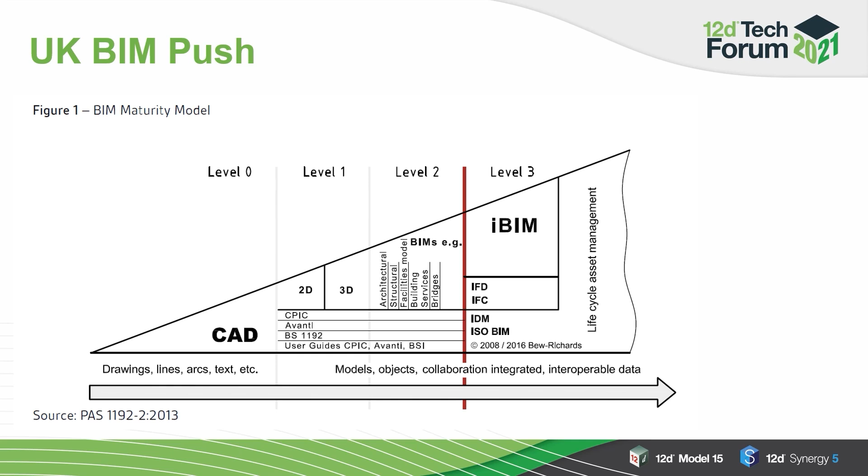What this set up, and this was their outline, is you had down at level 0 just drawings, CAD. Then you had some 2D and level 1, which had some 3D data. And further on down the track, they started to do more total models. But in that, there was no roads, rail, tunnels at all.

Now, I'm going to talk about two types of BIM, vertical and horizontal. But they're both civil projects. So why on earth didn't the IFCs to date in 2x3 cover both of them? I'm going to look at the differences that caused all the concerns. With a vertical project, it's confined to a small area, usually a building site, and then you go on up. You use a local origin, say 0, 0, and you measure distances from it. So you have small coordinates. And the distances are ground distances, the distance you get when you use a tape measure. A rectangular grid is normally used for setting out things, and the objects are 3D with a volume.

For a horizontal project, it goes over kilometres, even hundreds of kilometres. We have to use, therefore, world coordinates, which are mapping coordinates, and they're in the millions. We need that because you need to be able to place anything anywhere in the world for roads and things. You can't just take over the whole site that you're going to work on forever. The distances are what we call grid distances or map distances, and they're not ground units. That's important. It's not the same as you get with a tape measure. We have to use linear referencing, where you use alignment and offset. Think chainage and offset, station and offset. And the objects are points, strings, tins, and 3D objects which have a volume.

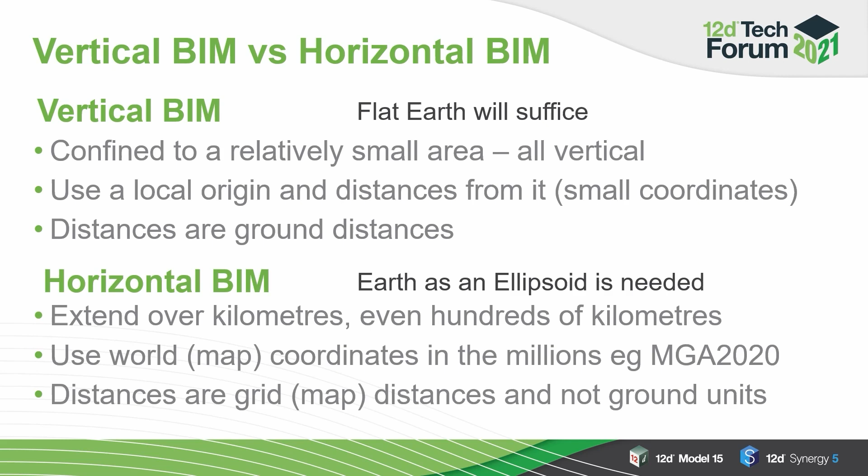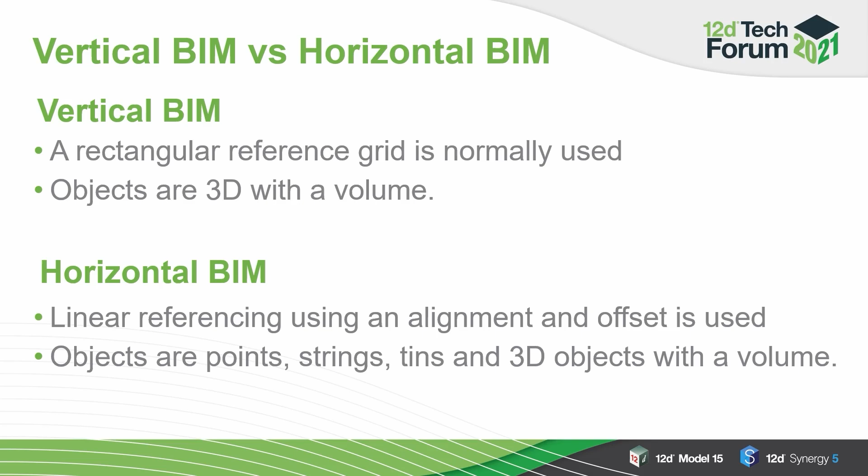Also, for vertical BIM, you have a rectangular reference grid, and your objects have 3D with volume. Whereas in civil BIM, your reference is usually used with an alignment and an offset being used. As I say, there are all sorts of different types of objects - points, strings, tins, alignments - which were not in IFC 2x3.

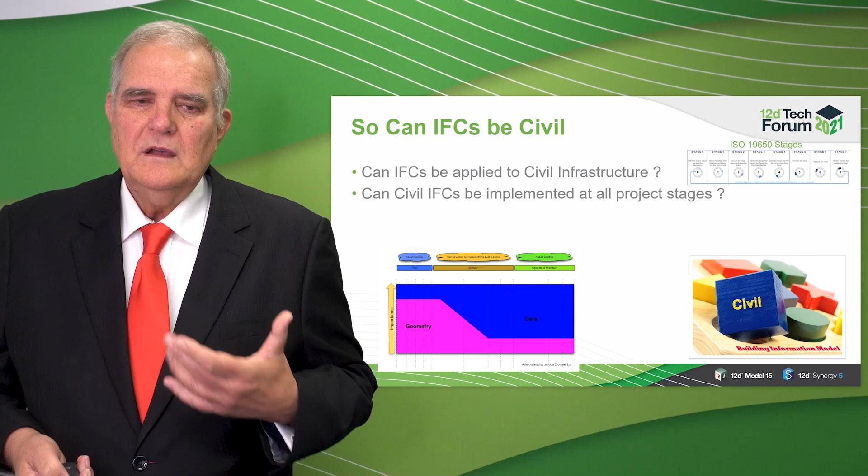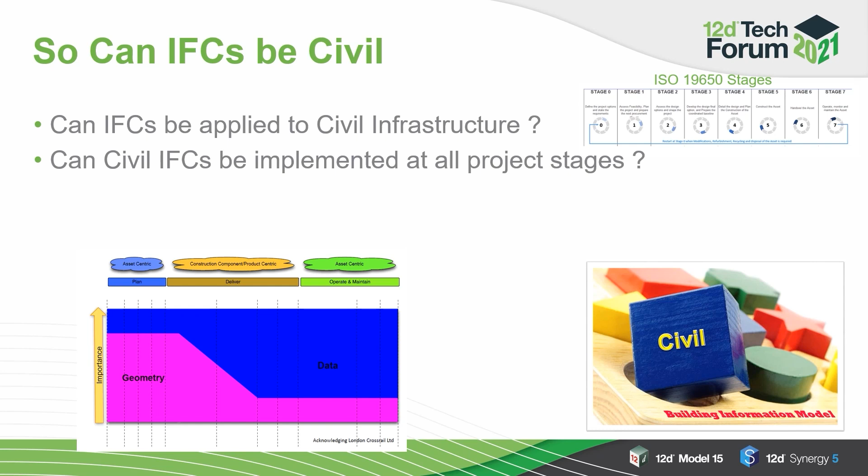Now, can IFCs be civil? Can IFCs be applied to civil infrastructure? Can they be implemented for all stages of projects? Because if you go to the Building Smart International talks, they talk about IFCs being used throughout the whole project. So if you look at your 19650s, it's got all these different stages mentioned, and what's needed over a life cycle of a project changes.

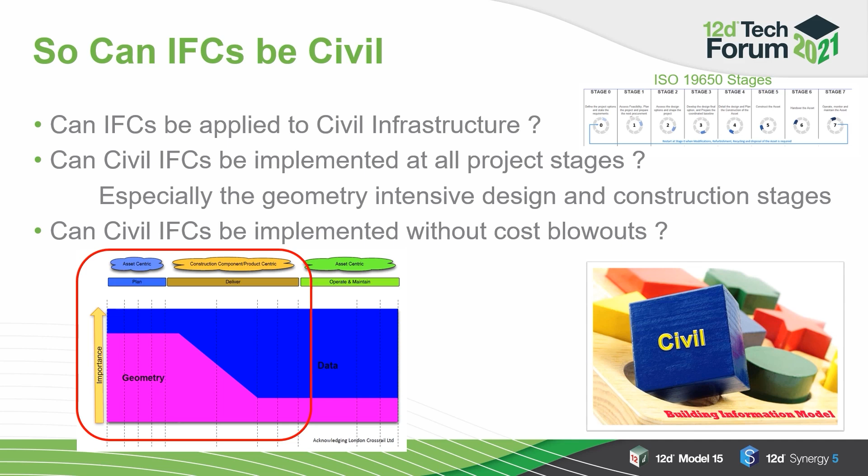Right at the beginning, up until it's actually constructed, you have a lot of geometry. Often after that, you only have lots of attributes. In fact, when you're going to asset management systems, sometimes they don't even take your geometry - all they want is a whole lot of attributes. So we're really worried about that early stage where it's thick on geometry. So can you also implement IFCs without cost blowouts? Because you really are trying to beat that project clock.

To be a civil BIM system, you need to support large coordinates. You need to handle long and large horizontal projects using map coordinates, not local coordinates. You need alignments with transitions and things. You need linear referencing. You need helixes for arcs.

Now, why on earth do you need that? Why don't you just need an arc in 3D? Well, that's not what we use in civil. A pipe is usually an arc when projected down onto the plan. Then your Z value runs up the side of that, so it's actually a helix. Not many people realise that.

You need strings with diameters and without diameters. You have survey points, break lines, edge of roads and so on, drainage pits and pipes, null Z values. Now people say, why wouldn't you want a Z value? Well, if you're a surveyor or someone else, you don't want to give it a Z value if you don't know one - someone might believe you. Cadastral information usually doesn't come with Z values, so you don't want to give one. A name and coding system.

Actually, in Australia, we've used that from at least 1980 - codes for all the strings and objects. You want tins for surfaces, like your ground surface. You need point clouds, since that's the way a lot of this data is now being picked up. You need polymeshes or trimeshes for 3D objects, and you want hierarchical attributes for your strings, vertices, segments, tins, polymeshes, and so on.

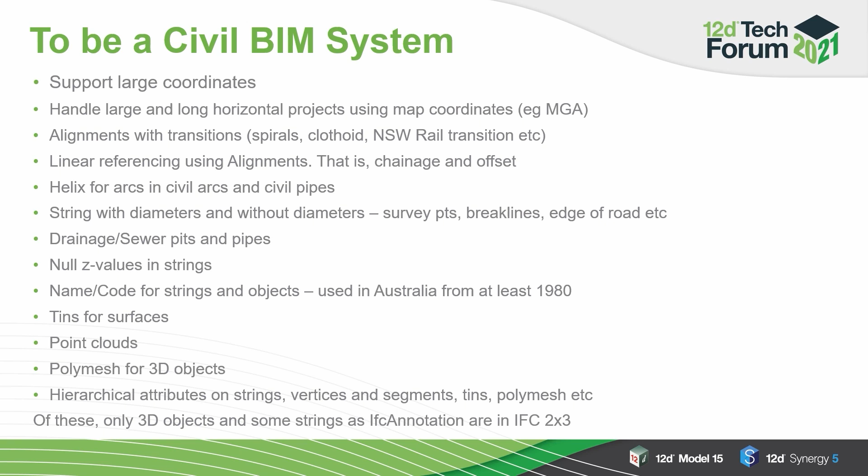Of these, only 3D objects and some strings were actually in IFC 2x3, and that's what's been around for the last 15 years. So Building Smart International were aware of this, and so they had a number of working groups looking at extending IFCs to civil - they were working on roads, rail, bridges and tunnels.

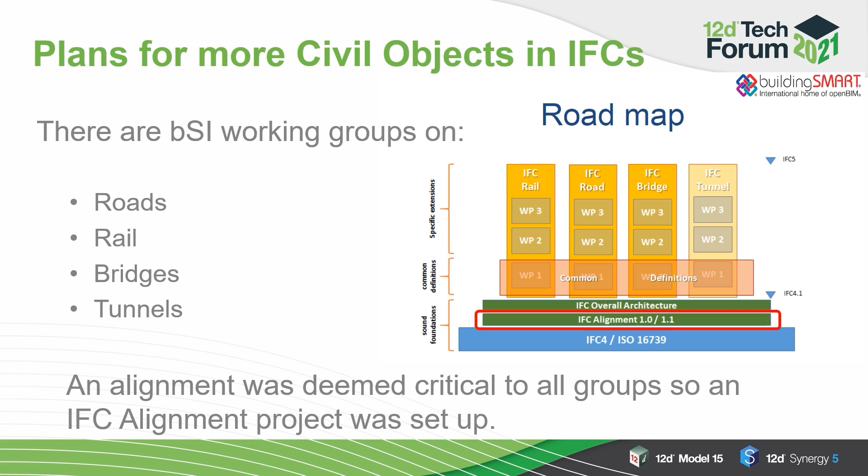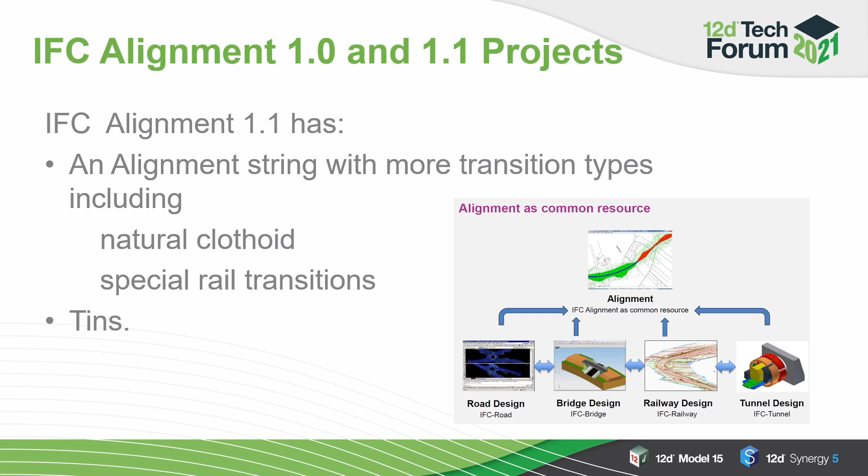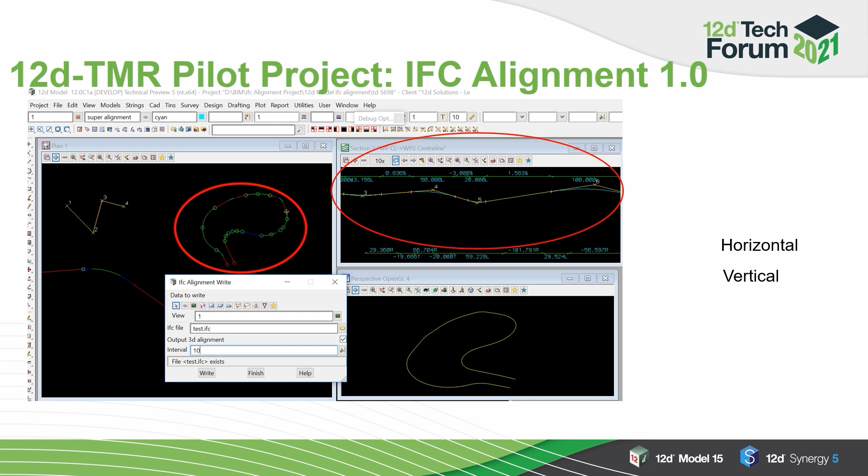And what they realised, an alignment was deemed critical to all the groups. So an IFC alignment project was set up. Alignment 1.1 was the final one, and it had strings with more transition types including the natural clothoid and special rail transitions. It also had tins. We were involved in that project with the main roads, and basically we actually read in an IFC alignment string with a horizontal and vertical - remember, you can have horizontal without vertical, and also the 3D alignment. And we presented that in 2016.

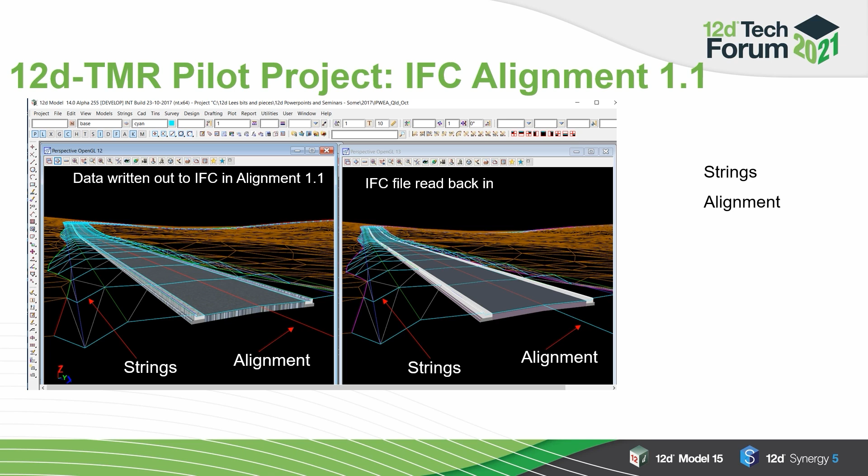Then we continued on with this work, and you could again have strings and tins and alignments and the 3D objects that go with them, such as the road pavements. And basically that was in 2017, so that was alignment 1.1. And that's the whole thing written out again, read back in to show, yes, it's all there properly.

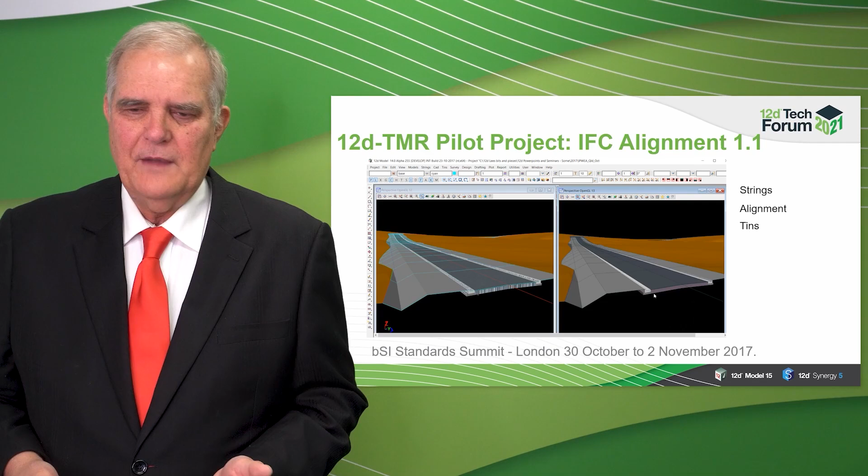Now, what was the outcome of that IFC 4x1 project? Zilch. Although 12D Model and a number of software groups participated and successfully passed around alignments and tins, when IFC 4x1 was actually released, the traditional architectural BIM software vendors never implemented it, and the industry was left stuck with a 15-year-old IFC 2x3.

What do you do in such a situation? Well, a lot of people then start talking about digital engineering and wait for IFCs to mature. So what is digital engineering? Deja vu - again, most people have no idea what it is.

Luckily, Transport for New South Wales came to the rescue here and gave a bit of an idea of what it was. It says a collaborative way of working using digital processes to enable more productive methods of planning, design, and so on. And this is achieved by creating a common data environment, whatever that is, that aligns digital information including CAD, GIS, 3D BIM, and so on. So we did at least have something about digital engineering.

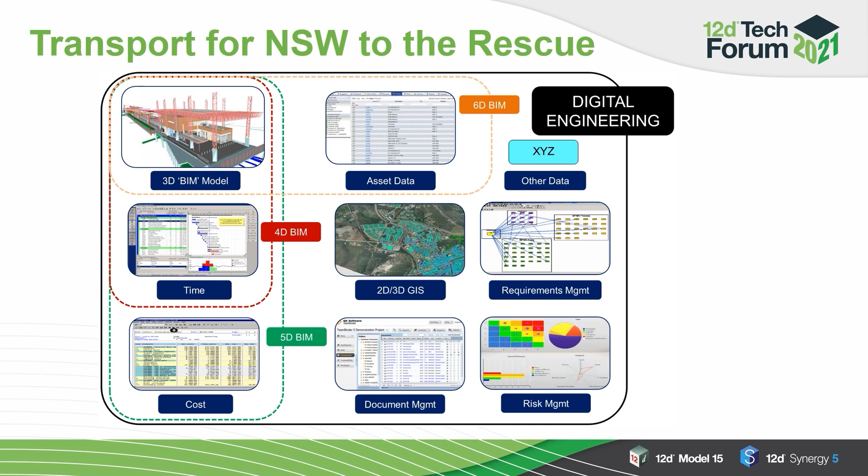Now, do not despair though. Building Smart International has continued to work on the problem, and they came up with two things: the model setup IDM and also IFC 4x3. The Building Smart model setup Information Delivery Manual - what a mouthful - was then restarted, and the project was started off again in 2016.

John Mitchell from Australia was the lead. Then 12 nations were involved, including Australia, and I was part of that and produced a lot of the information for it. It spelled out what ellipsoids, projections, and map coordinates are, also emphasised that civil projects must be in map coordinates, and said the vertical and horizontal datums and the map projections are stored in the IFC Projected CRS entity - so it's right there for it. And IFC 4x3 extended this to any CRS and map projection, whereas the early ones didn't allow all the ones.

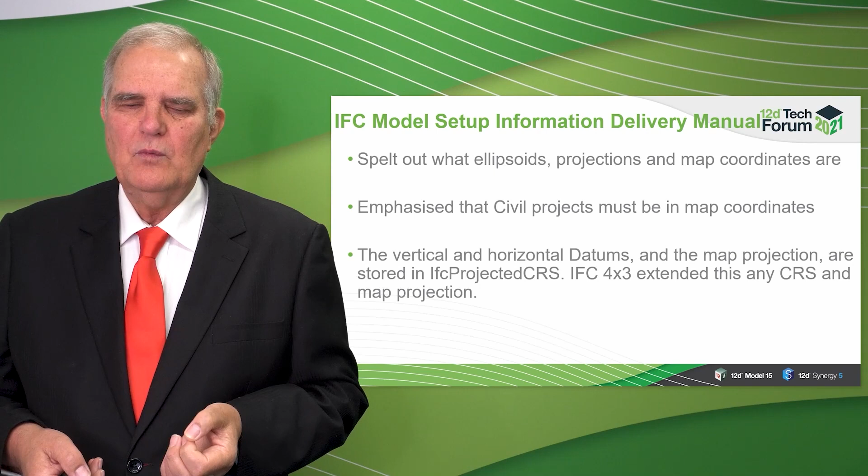Similarly, it also said how a 2D Helmert transformation could be used to bring small little area sub-projects, which are in flat Earth local engineering coordinates, into your overall map coordinate project. So you've got a small little one, and how does it fit with a big one? This is the big quandary, the big problem. And the required 2D parameters are stored in what's called the IFC map conversion. So all that information could be passed over if you brought in such data.

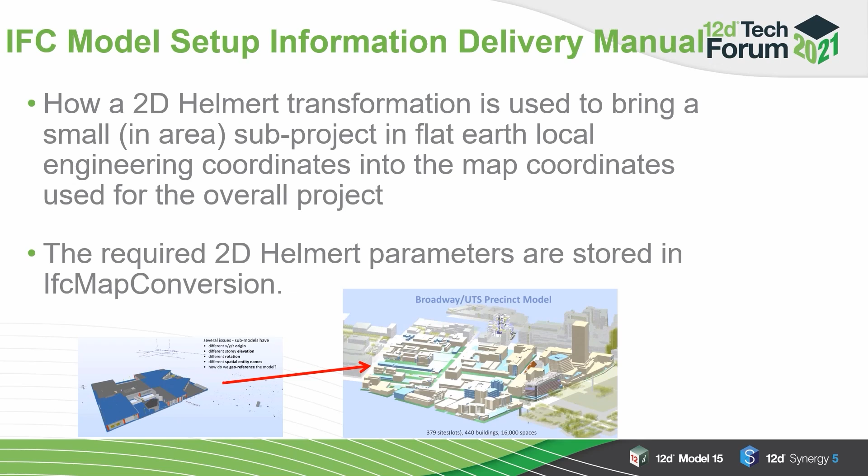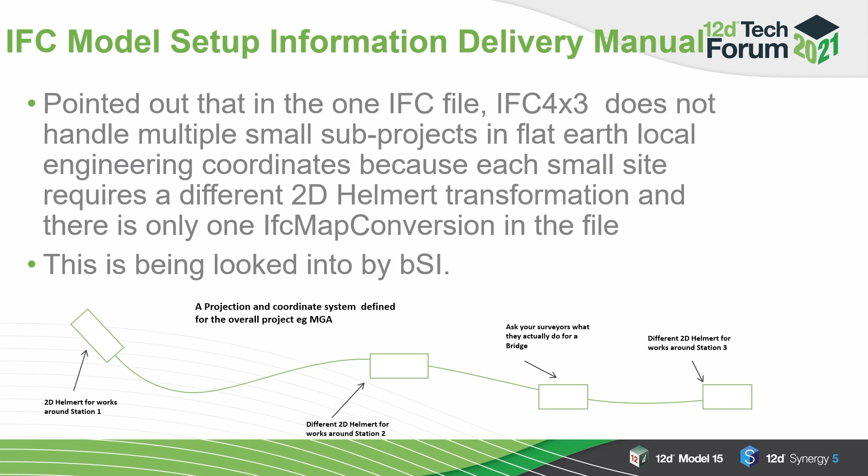It also pointed out that in one IFC file, IFC 4x3 does not handle multiple small sub-projects in flat Earth local engineering coordinates, because each of those sites needs a different 2D Helmert transformation, and IFC map conversion holds only one of them for the file. But this has been looked at by buildingSMART International. There's again plans for more civil objects in IFCs. Deja vu. It looks a lot like before, but this time it's going to be there for IFC 4x3.

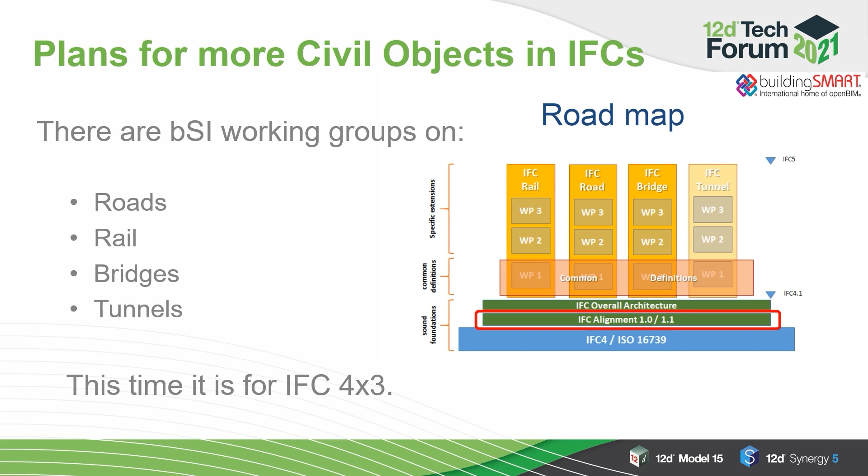So actually, buildingSMART International working groups have been very active for the last 4 years or more on IFC 4x3, and it's now in the release candidate stage. It should be ratified and published next year. And the IFC alignment is there, and it's actually been extended for IFC 4x3, and TINs are also in there as well. And linear referencing, which is not in the early one, is also in there. So most of those sorts of things we need are there.

So to be a civil system, what do we have before? Large coordinates, always been handled by IFC. Yes, you can have long, large projects and know about your coordinate systems and everything. You've got your alignments, you've got linear referencing, you've got your helixes. You could use an alignment for that. You've got your strings with diameters. With diameters and without diameters, you have to use IFC annotation. I know that's strange, but it is there.

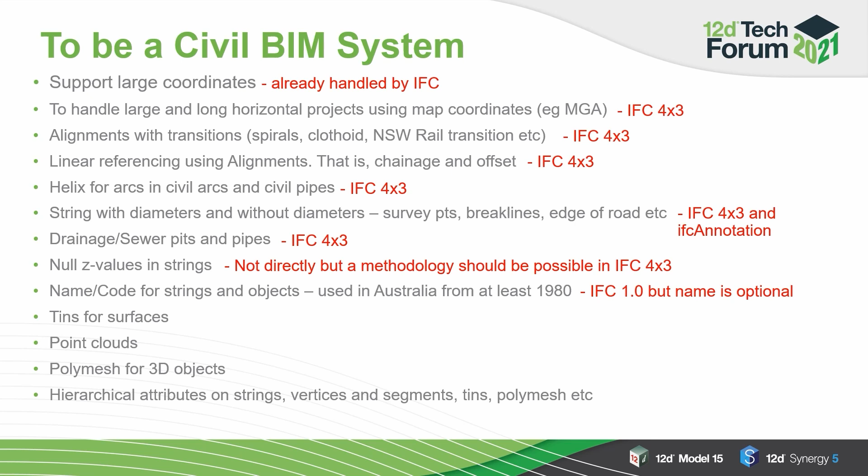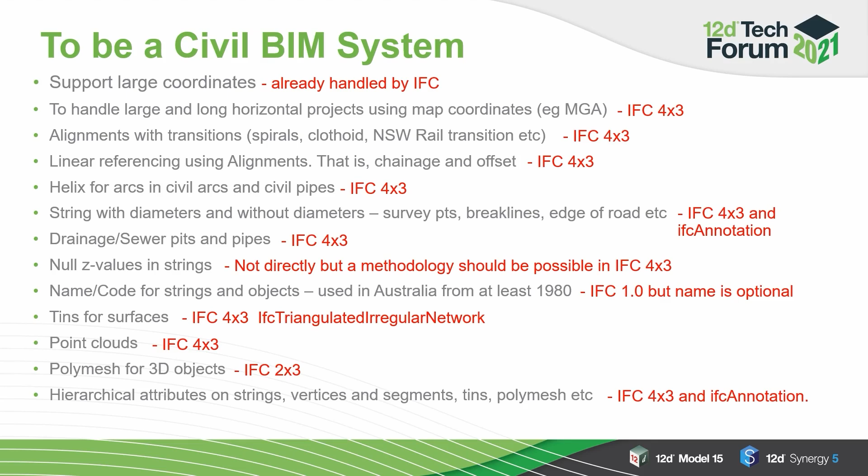You can have drainage and sewer pits, null Z values. That's not directly there, but I think we can come up with a methodology so we can handle it. We do have names in there, although they're optional. So most projects you should be saying, I want those names not to be optional. You have to have them. We've got TINs, we've got point clouds. I don't think people realise how big they are. And polymeshes are in there from 2x3. And they've got heaps of attributes and things. And again, the tricky ones like vertex and segment attributes, we should be able to figure out how to do them in there.

So, will IFC 4x3 be more successful? Well, I believe it will be, because one thing that's happened is the Open Design Alliance, which we're a member of, has committed to implementing IFC 4x3. And that means over 2,000 ODA members will have access to IFC 4x3 readers and writers. So basically that should solve the dearth of software problem that killed IFC 4x1.

So with Civil BIM, the question isn't really how is it going, but why has there been so little progress? And the answer is actually very, very simple. It's called history. IFCs have been going around since 1996, I think they started. They grew up in a vertical world and only needed to address vertical problems. So the people involved in IFC were mainly working in vertical areas, for example, architects. And it was mainly the architectural software that was involved. And for buildings, you only needed flat earth and local engineering coordinates. So that's all they had to have.

But the last 7 years, we have been trying to work on IFCs for civil. And to date, though, not many experts from the civil authorities and companies, and only a few surveyors, have actually been involved in the nuts and bolts of IFC for civil. So that means the problem has still only been looked at from one direction, that of local coordinates. But it looks totally different from another direction when we're using map coordinates. So our goal is to have your information in IFC that works for both viewpoints.

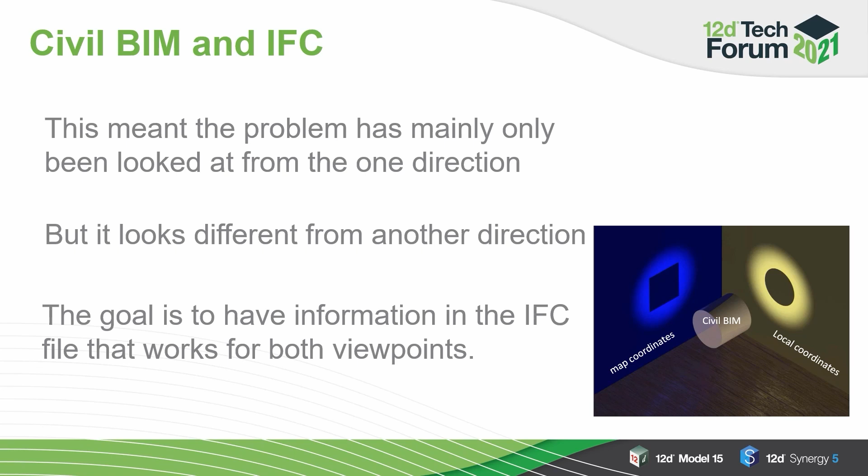Luckily, 12d Model is already a civil BIM system. What is missing in the industry is general support and understanding for project setups and the IFCs that you can use for civil BIM in, say, IFC 4x3. So yes, BIM and IFCs can be civil. It just needs civil knowledgeable people to help specify the geometry and, importantly, the attributes that you want in there, because not every geometry is to be used. There's all sorts of weird geometries in there that you can't use on a civil site, and to demonstrate how it can be done.

And you'll actually see in a lot of the talks in our technical forum, people are doing BIM models now, putting all the data in, getting it around, passing it through, some fantastic projects. They're all though mainly using IFC 2x3 because that's all the other software can handle. So surveyors and designers, Civil BIM needs you.